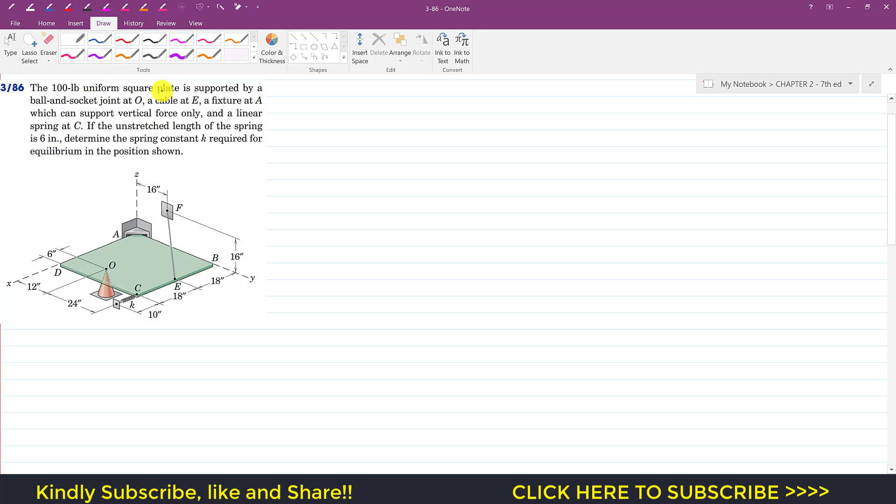Now we are going to solve this problem which says that the 100-pound uniform square plate is supported by a ball and socket joint at O. We have this square plate which is 36 by 36 inches and it has a weight of 100 pounds, and it is supported by this ball and socket joint at O, this cable EF, a fixture at A which can support vertical force only, and a linear spring at C.

So at C we have this linear spring which has some stiffness K, and it is said that if the unstretched length of the spring is 6 inches, determine the spring constant K required for equilibrium in the position shown. So the unstretched length of the spring is 6, and as we can see this spring is stretched to a distance of 10 inches.

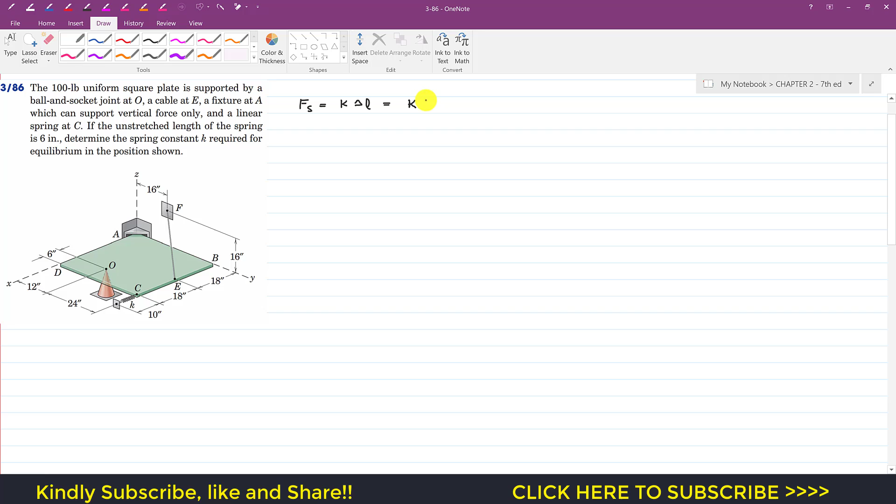As we know, the spring force is equal to K, that is the stiffness, times the change in length. K is not known, and the stretched length is 10 inches and the unstretched length is 6. So 10 minus 6 is 4, so we can say that the spring force is equal to 4K, and this is in pounds.

Now we have to find the spring stiffness, and the plate is in equilibrium. So at point E, if we cut this cable, we will have the tension T in the rope, which is going to act in this direction from E to F. Similarly at O, since we have a ball and socket joint, we will have the OX reaction. Then we will have the OY reaction in the positive Y.

And then we will have the OZ reaction. Let's say the OZ reaction is acting in the positive Z direction. So this is OZ. And now at C we will have the spring force which is going to act in this direction. This is the spring force.

This is Fs. And it is said that the fixture at A can support the vertical force only. So here we have the AZ reaction only in the vertical direction. So this is AZ, and this is the tension T.

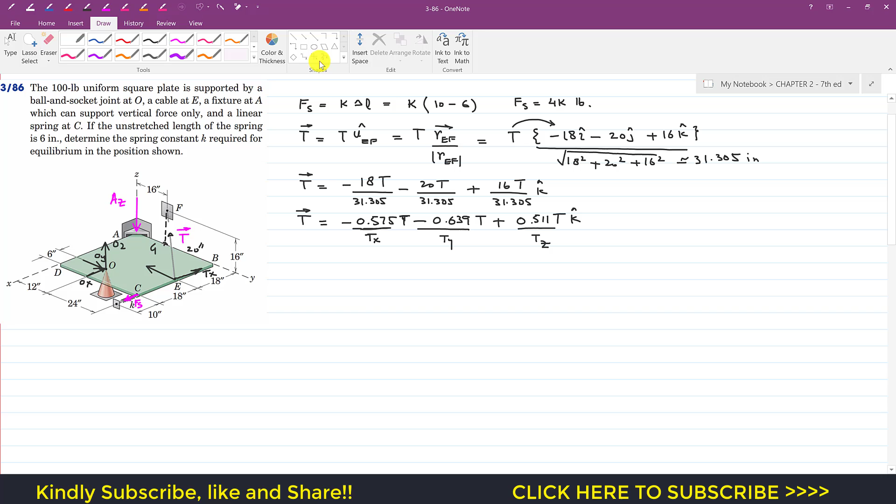Then we have a negative component in the y direction. This is Ty. This is Tx. This is Ty. And this is Tz. So Tz is acting in the positive z direction. Let me show that. So this is Tz. This is Tx, this is Ty, and this is Tz.

So now, since the system is in equilibrium, if I apply the summation of moment about point A, I am going to solve this by vector analysis, right? So the summation of moment at point A will be equal to 0. And then we have to find the moment of this Fs, this tension T, and this O reaction. So first of all, we have to write the moment of this tension T. For that we have to define the position vector, and that moment arm will be from A to E.

So the moment produced by the tension T will be the position vector from A to E cross that T vector. Then we will write plus the moment due to that reaction at O. This will be the moment arm from A to O. So we can write the position vector from A to O cross product with that O vector.

Now this O vector is the resultant of this Ox, Oy, and Oz, which gives us the Cartesian vector representation of the reaction at O. So that will be Ox i plus Oy j plus Oz k. Similarly, for the moment due to this spring force, we have to define another moment arm or position vector, from A to C. So now I will write plus position vector from A to C cross the vector of that spring force.

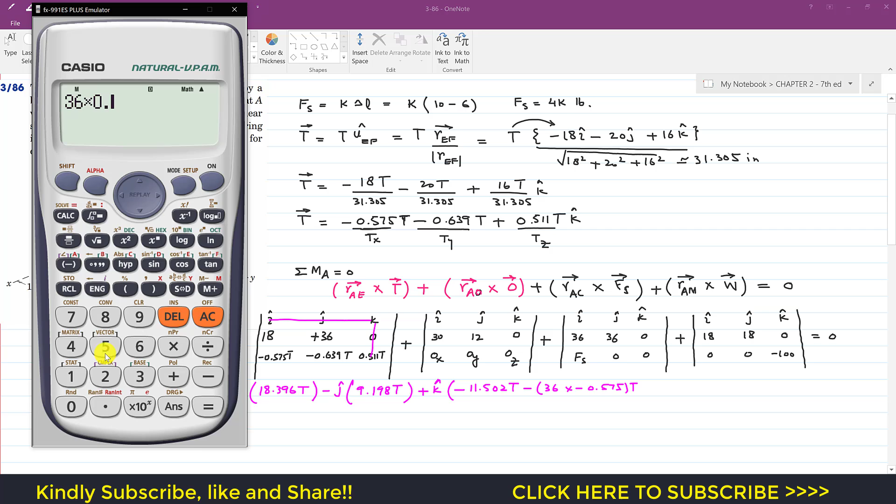This is 18 into this. We write 18 into minus 0.639. This gives you minus 11.502 T, and then minus 36 into this. So minus 36 into minus 0.575 T. So let me find this. This is 36 into 0.575, which gives me 20.7, and minus into minus will become plus. So this is plus 20.7 T.

And now we can add both of these. So this is minus 11.502 plus 20.7. This gives me 9.198 T.

Now we have to find this determinant. Again we have to hide this and this. So again we have plus I, and then 12 OZ minus 0, then minus J, 30 OZ minus 0, and then plus K, 30 OY minus 12 OX.

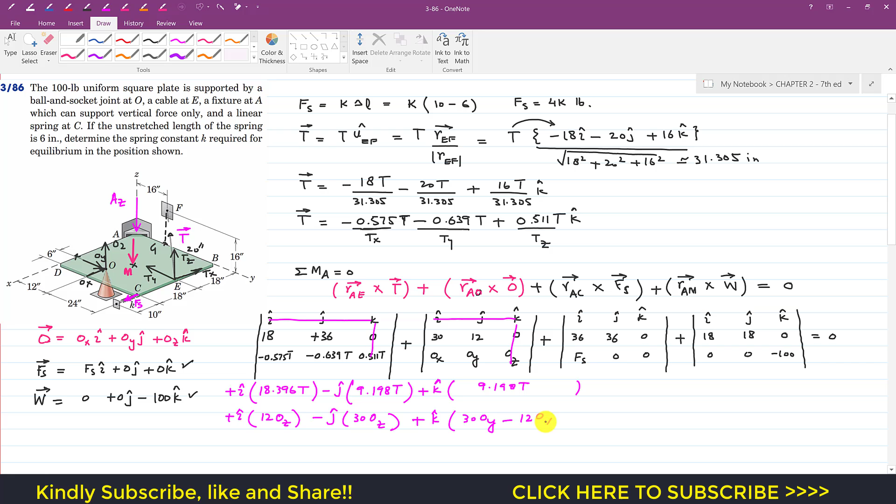And similarly we have to find this determinant now. So for that we have to hide this and this. So this is plus I again, and this is 36 into 0, 0 minus 0, so this will give us 0. And then for J we have to hide this. This is minus J, 36 into 0 minus 0, so this is again 0, and then plus K. So for K, this is 36 into 0 minus 36 into Fs, minus 36 into the spring force.

Now we have to find this last determinant, which is again plus I. So for I we have to hide this and this. This is 18 into minus 100 is minus 1800, minus 0, then minus J, then again minus 1800 minus 0, so minus 1800, and then plus K. So for K, this is 0 minus 0, so this is 0, and all these summation will be equal to 0.

So now we have to add up all the I terms, J terms and K terms, so that will be the summation of moment about the x-axis, the y-axis, and the z-axis. So the summation of moment about the x-axis, we add up all the I terms. So this is 18.396 T plus 12 OZ plus 0 minus 1800 equals 0, or we can say that this is equal to 1800.

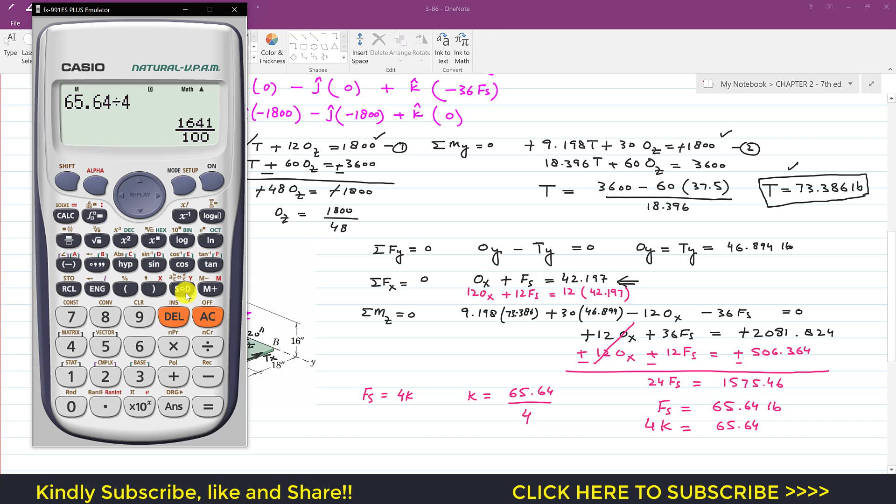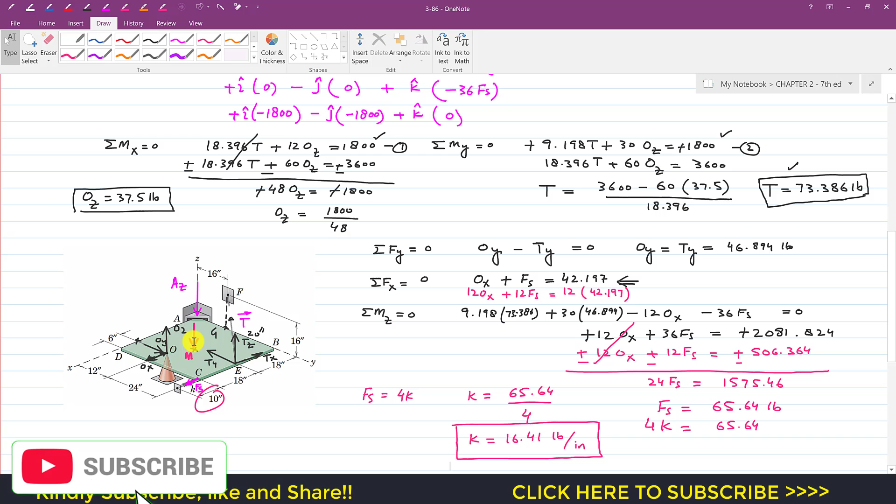Now the spring stiffness k will be 65.64 divided by 4. This gives us 16.41, so the k value is 16.41 pounds per inch. This is the spring stiffness required to maintain this 36 by 36 plate of weight 100 pounds in equilibrium. So this is the solution of this particular problem.